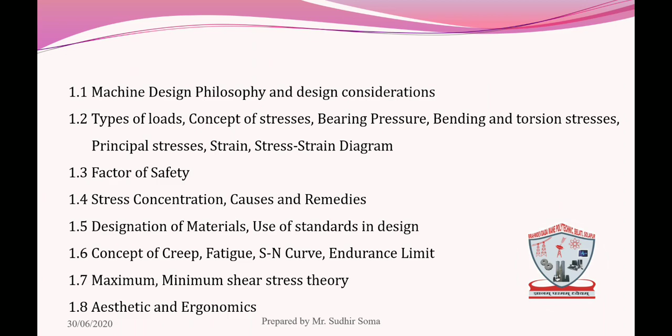Now, today I will show a PPT on machine design elements. That is the remaining part of Unit 1, that is the fundamentals of design. You have seen the philosophy, types of loads, factor of safeties. So now we are going to see the stress strain curve for ductile material.

First, what is meant by ductility? The ability to be drawn into wire or elongated is known as ductility. So what are the examples of ductile material? Aluminum, gold, copper. These can be drawn into wire. That property is called ductility.

So you see the stress strain curve. OA represents proportionality limit, then upper yield stress point, lower yield stress point, ultimate stress point, and E is fracture, that is the breaking stress. So we see one by one what is meant by proportional limit.

When the load is applied to a specimen, there is a continuous elongation of the bar from point O to A, where stress is proportional to strain. That is, as stress increases, strain also increases. The line OA represents the proportional limit.

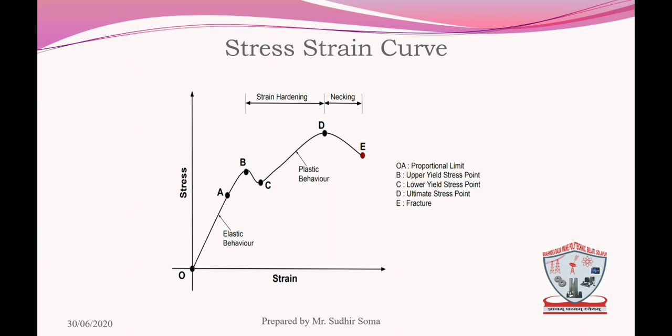Next slide we'll see what is meant by stress concentration. It is the location in a machine component where stress is concentrated. A component is stronger when force is evenly distributed over its cross sectional area. So a reduction in area, for example caused by a crack, results in a localized increase in stress.

During the design of any actual machine component, discontinuities such as keyways, threaded holes, grooves and steps are present, as a functional requirement to perform their functions. There are several types of stresses acting on the element, such as tensile or compressive stress, bending and twisting, that is torsional shear stress.

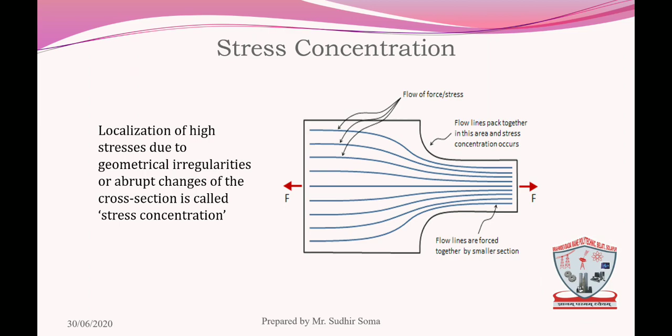So, whenever a machine component changes the shape of its cross section, the stress distribution pattern no longer holds good near the discontinuities. So, what does stress concentration mean? The irregularity, the high stress distribution caused by discontinuities. You can also define it as: abrupt changes of cross section form stress concentration.

So next slide you see the methods of reducing stress concentration. It occurs for all kinds of stresses in the presence of fillets, notches, keyways, splines, surface roughness and scratches. So what are the remedies to reduce stress concentration? You see the tie rod with hole, shaft with keyway, then threaded components.

One important thing: the effect of stress concentration cannot be completely eliminated, but it can be reduced by slightly altering the geometry of the components. The following figure shows the methods adopted for reducing stress concentration.

These include additional notches and holes in tension members, meaning use of multiple notches, drilling additional holes, removing roughness, avoiding sharp corners by providing a fillet radius, undercutting notch for member in bending, reduction of stress concentration in threaded members, and providing small holes near a big hole, or drilling additional holes for shafts. In this way, we reduce the amount of stress concentration.

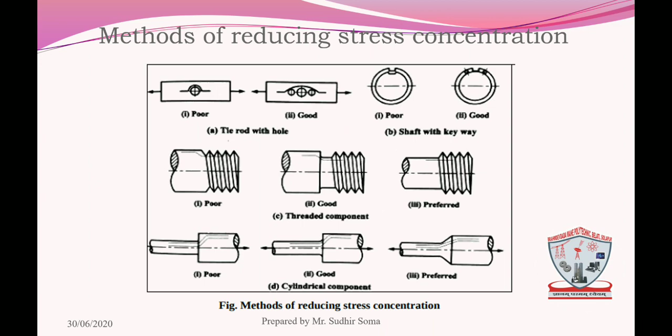So, next slide: how you will designate the standards of materials, since there are a number of materials present. So how will you designate them? According to IS standard specifications, different materials are designated by using alphabets followed by some numbers.

Some of the examples: FeE 200 means it contains a steel with minimum yield strength of 200 Newton per mm square. Next you will see 35C8, which means plain carbon steel containing 0.35% carbon and 0.8% manganese.

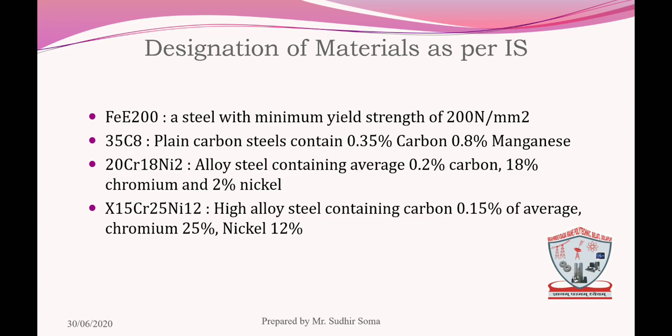Next you will see 20Cr18Ni2, that is the alloy steel containing average 0.2% carbon, 18% chromium and 2% nickel. So in this way the different materials are designated as per the IS standard.

So next slide you see the theories of elastic failure. There are a number of machine components that are subjected to several types of loads. Simultaneously, combined stresses are induced in them, such as torsional shear, bending stress, etc. Mainly, the failure of such components is classified into two groups: elastic failure, that is yielding, and fracture.

The elastic failure results in plastic deformation, which makes the machine component unfit to perform its function satisfactorily. The theories of elastic failure provide a relationship between the strength of a machine component subjected to a complex state of stress. So some of the theories of elastic failure are listed:

Maximum principal stress theory, also called Rankine theory. It works on brittle material. This theory states that elastic failure occurs when the greatest principal stress reaches the elastic limit value in simple tension test, irrespective of the value of the other two principal stresses.

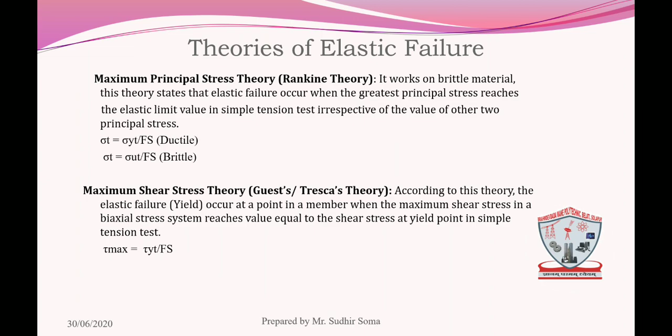Okay. So next slide, you see what is meant by creep. To understand the phenomenon of creep completely, the following diagram will be helpful. So first of all, what is meant by creep? It can be defined as the slow and progressive deformation of a material with time under a constant stress.

You see the figure: if a stress below the proportional limit is applied in tension, an elastic strain will occur immediately upon application of the load, and regardless of the duration of application, the strain will remain constant. So this is the concept of creep strain and creep curve.

One more thing I will tell you: in the first stage creep continues at a decreasing rate that becomes approximately constant during the second stage. The beginning of the third stage is marked by a rapid increase in creep rate.